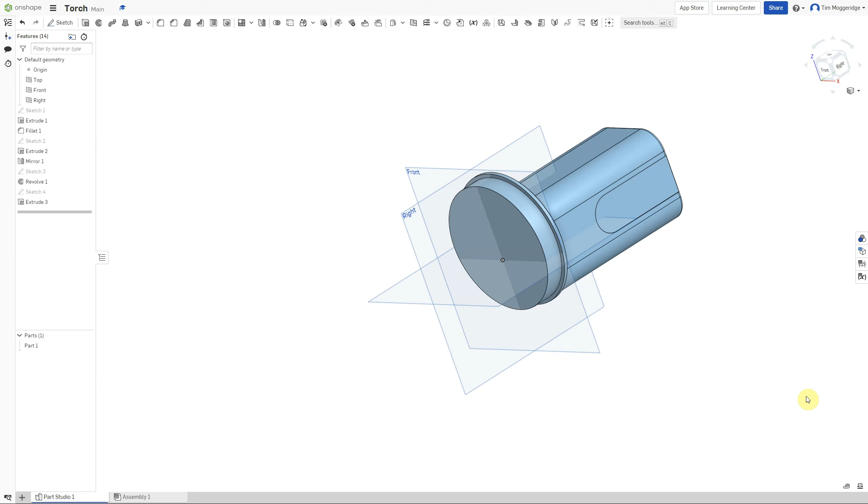Welcome to the third Onshape tutorial for modelling a torch. On screen I've already loaded what we've done in the previous two videos, and now we're going to add on the bit of the casing that houses the button.

I'm going to click on here and go to isometric just to put this in a sort of a 3D view. And the first thing I want to do is to create a new work plane.

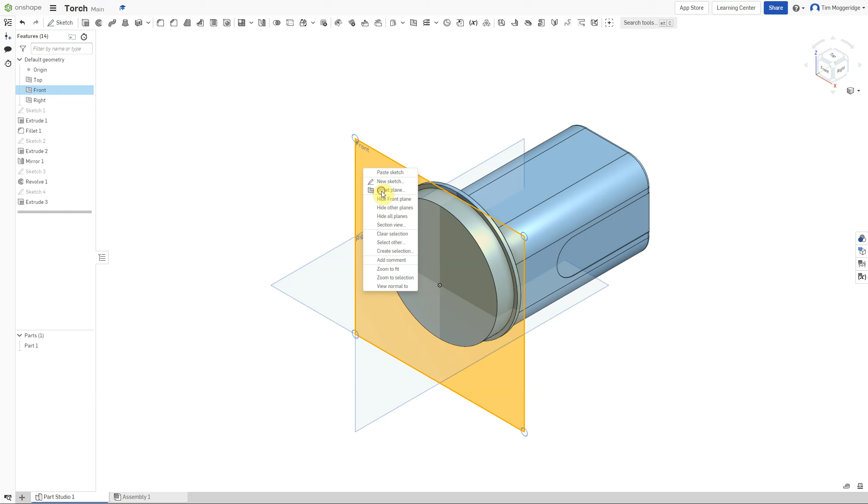I can create this a couple of ways: either use the plane feature tool up here, or right click on the front work plane and left click on offset plane. Now it defaults to 25mm distance, but I want that to be 66.

You can also see that it's trying to come forwards of the plane, so if I spin that around it's coming ahead of it, and I want it to be in the other direction, so I'm just going to click on the arrows to reverse it, and then click on the tick.

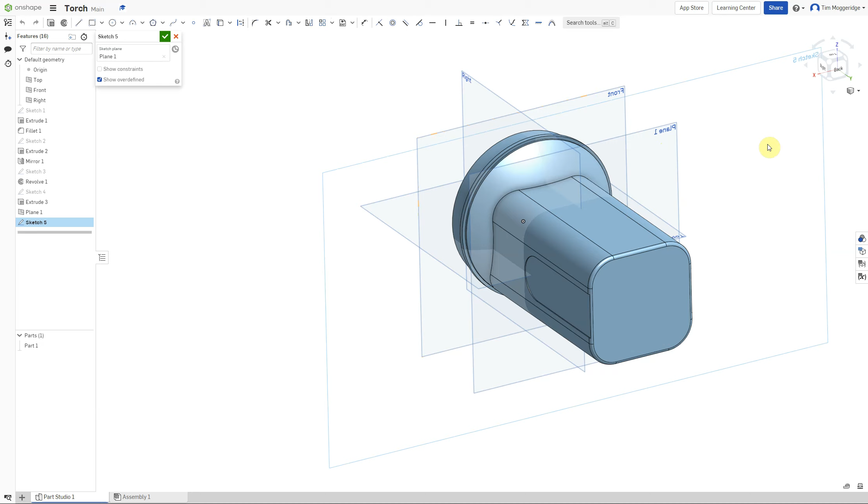If I spin that round, I'm now going to right click on plane 1 and create a new sketch, and press the N key for normal to. Doesn't matter if it was spinning around the other way and I was viewing from the other direction, I can still do this sketch the same.

I'm going to use the line tool to create this sketch, and I'm just going to zoom in slightly so that we can see the edge of the right plane a bit more clearly, because we're going to use that as our guide for starting our sketches.

Now if I draw a line, hovering so it's over the origin and lined up with the edge of the front, the right work plane, and I left click and hold and drag the line out and then let go, it doesn't want me to carry on with another line. It knows that I just want to draw one line.

However, if I click to start the line and then click again to end the line, it assumes I want to add an extra line in. So let me demonstrate that.

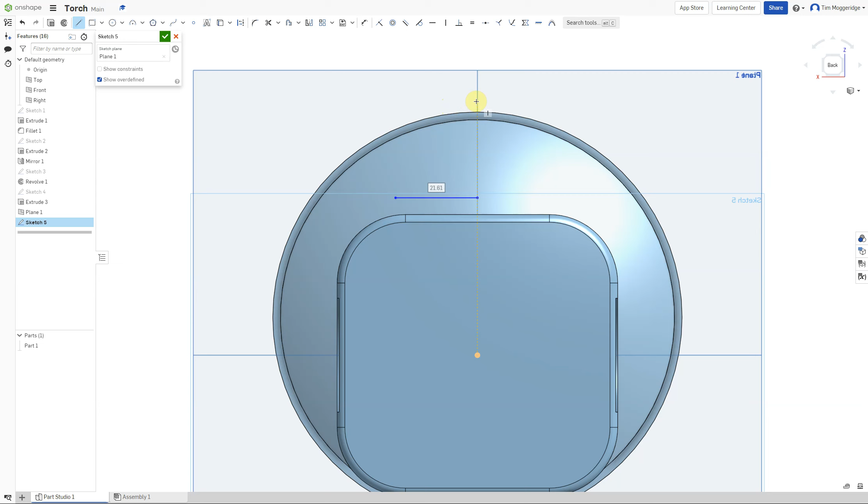Again, I'm going to line up with the edge of the work plane, which also lines up with the origin - you can see the dotted lines. I'm going to left click, draw a slightly shorter line, left click again, and then left click on the end of that line. Because I left clicked on the end of that line and it's completed the line, it's not tried to draw another line.

But if I go left click, left click, left click, left click, it keeps drawing lines until I close it or press escape. Okay, I'm just going to turn the line tool off, drag over there, and then press my delete key to delete those lines.

Okay, so let's put some dimensions onto these lines. First of all, I want to dimension how far up this line is from the origin. So I'm going to left click on the origin, left click on the line, left click over here, and I want that to be 36mm.

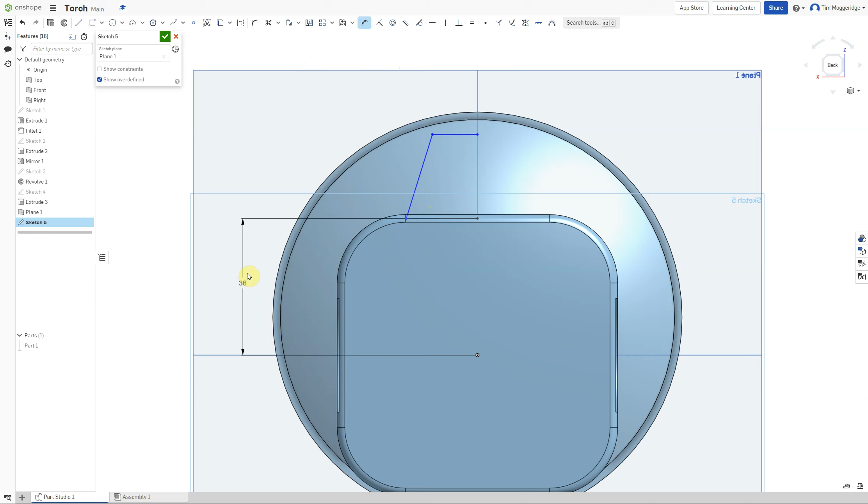And I want to dimension the length of the two lines. So the bottom line I'm going to left click on, come away from the line so it's nice and clear, and I want that to be 23mm. Then the top line I'm going to left click on and go above, and I want that to be 16mm.

Now I actually want a fillet here, a little radius, so I'm going to use the fillet tool. I'll click on the dot, and it's remembered the last number I put in, so it's put R3 in there, which is what I want. If it had been 18, because it was remembering an 18mm radius I'd drawn previously, I could change that after left clicking. 3mm is what I want, so I'll just enter that.

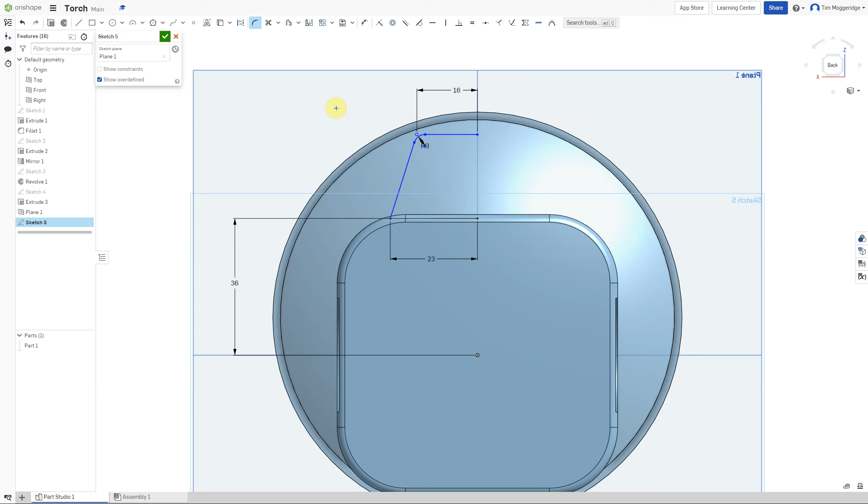Now I don't know what height this is, but I'm going to use the tangent tool to create the height here. I want this radius to blend with the radius of this circle here. So I'll click on my little radius, and then click on that one, and you can see it's moved it up.

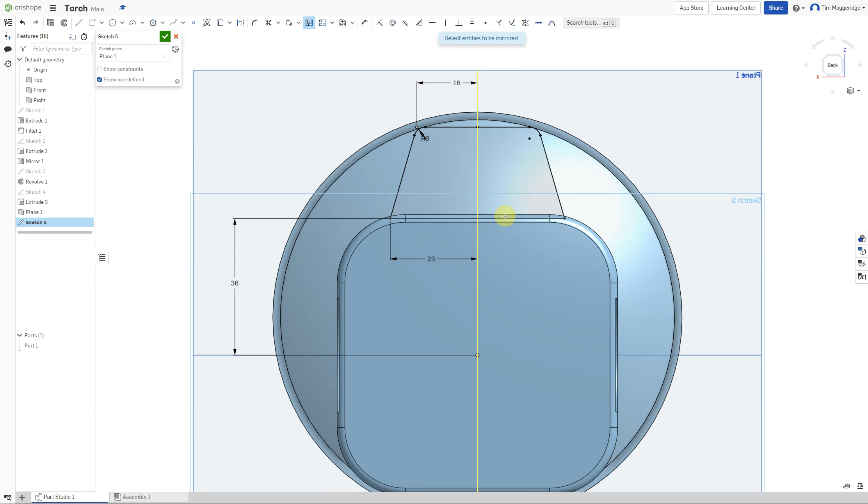What I also need is a full shape. I've only drawn one half, and the reason for starting on this edge of the work plane is I can use that edge as a mirror line. We've mirrored features before, so let's mirror the sketch. Using the mirror entity tool, we pick the line which is the edge of that work plane, then click on the lines we want to mirror, and that creates an enclosed space. Did you notice it just went light grey? If I spin that around, you can see it's a light grey colour.

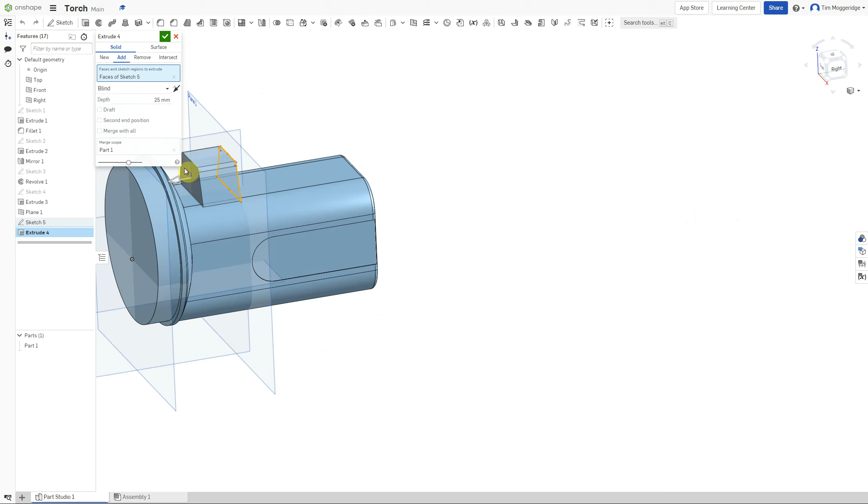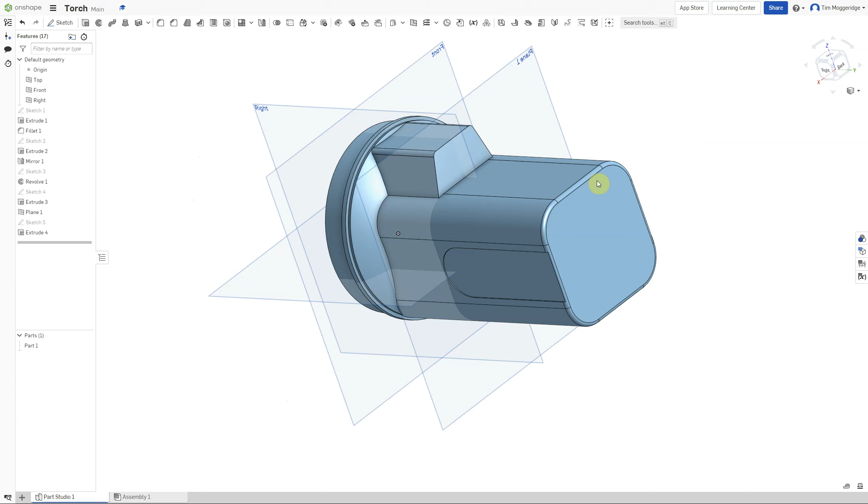So now I need to extrude that. I'm going to use the extrude tool, and it's gone off in the right direction. If I hold the right mouse button down and spin it around, you can see it's going in the right direction, heading towards the round part we did last video. But I want that to go up to a particular surface - it's adding, not creating new, which is right, but I want it to go up to a face, specifically this flat face here. If I click the tick and zoom out, right click and zoom to fit, you can see that shape.

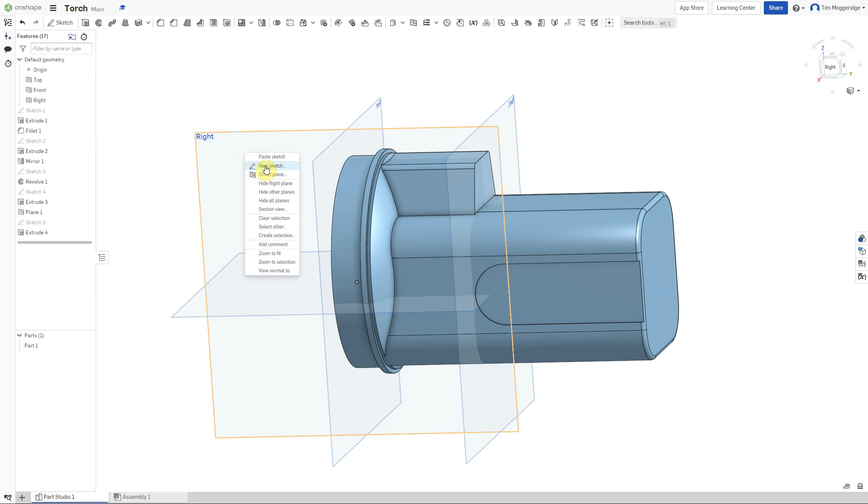Now the next thing to do is the part where the switch fits inside, which also forms part of the handle, so we need to start cutting out a shape at this end. I'm going to right click on the right plane, left click on new sketch, press N for normal, and we're viewing here, and I'm just going to draw a circle.

I'm now going to use the coincident point for the center of the circle and this vertical line. I'm not going to put it in the middle of the line because it would jump there and I don't want that, so I'm just going to make sure I click above the middle of the line, and that's lined it up.

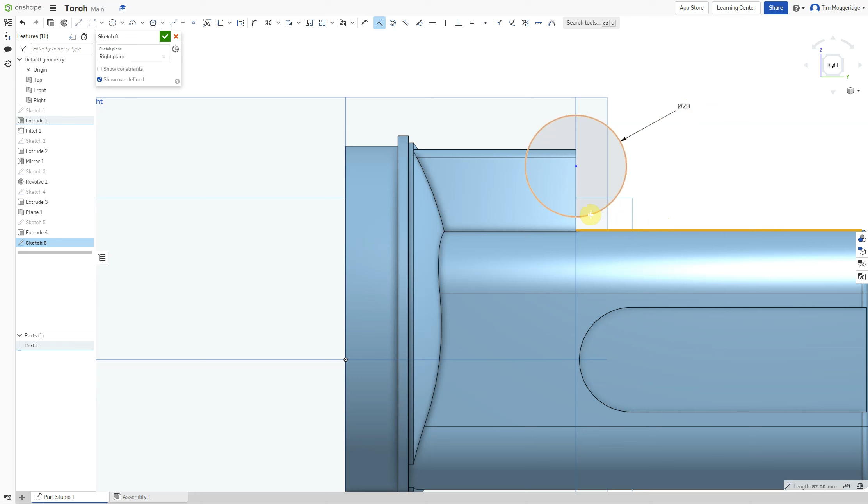And I'm now going to put in some dimensions. So the dimension of the circle, the diameter, is 29 millimeters, and I want the bottom of the circle to line up with this line as well. So let's try a coincident point - pick that and that. Now it doesn't like it: a coincident constraint cannot be applied to two curves of different types. So what do we need to do?

Well, actually what we need is the tangent tool. So let's click on the circle and then click on that line, and it puts a tangent in there. That's what we want - okay, so that's in the right place now.

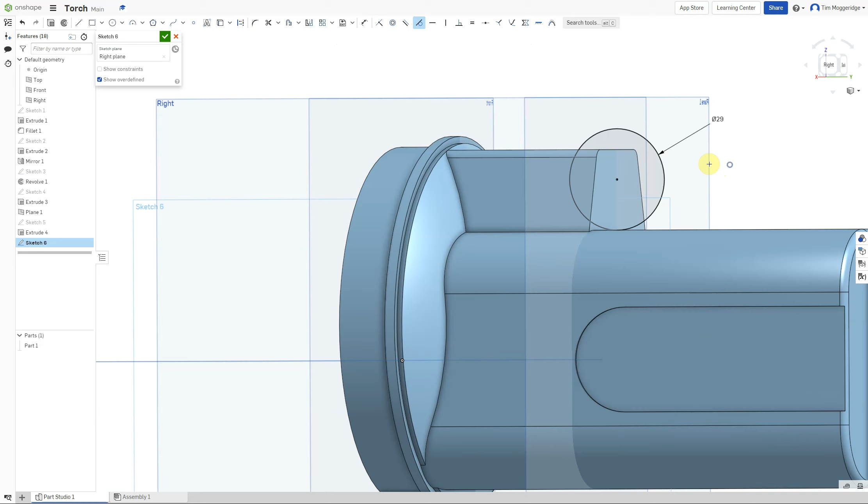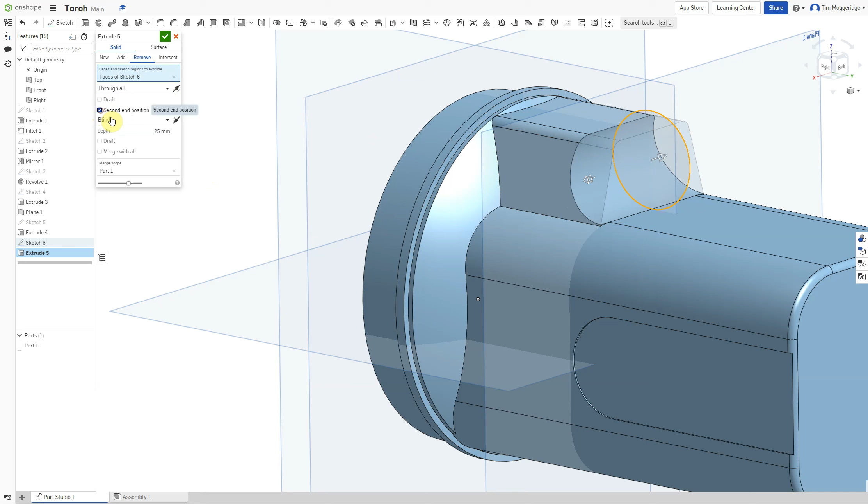What I now want to do is remove that shape from this block of material. So let's go to our extrude tool, and you can see it wants to add it in. Let's click on remove, and it's gone off in that direction, 25 millimeters. What I actually want is for it to go all the way through, so I'm going to go through all, then tick the box that says second end position, and make that go through all as well. Tick the box, and then we've got our nice shape.

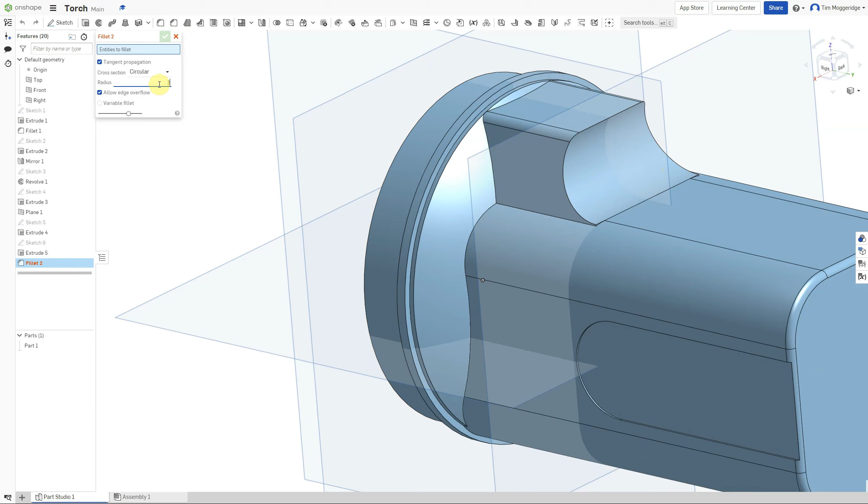Next thing we're going to do is put a fillet on here. This should have a radius on these two edges. So let's use our fillet tool, and I want that fillet to be 3 millimeters. I'm going to click on this edge, and you can see automatically, without clicking on the other edge, it's gone all the way around. Now I don't actually need a fillet on here, but it won't matter because later on we're going to get rid of that. The geometry of the model means it needs to apply a fillet all the way around, so we'll click the tick and we're happy with that.

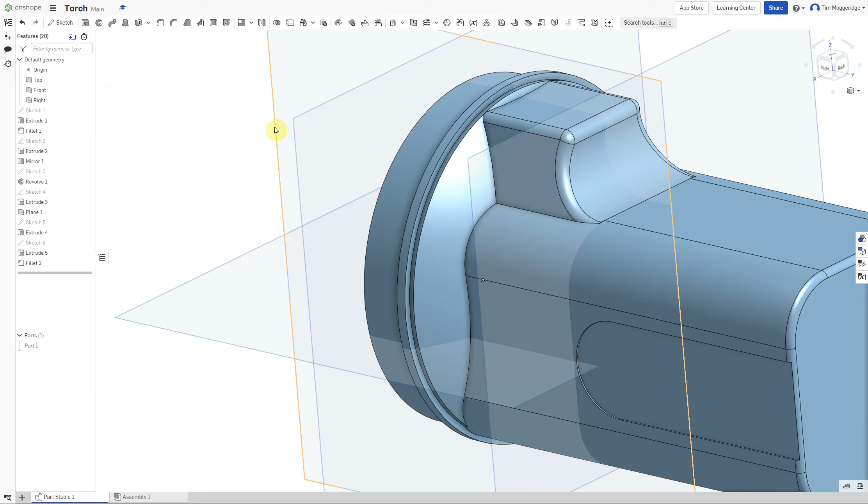Now the only slight problem with this is we've got a little bit of a step. If we zoom right in here, you can see we have a slight step where it's not blended into the curve, so we need to sort that out. I'm using the scroll wheel to zoom in.

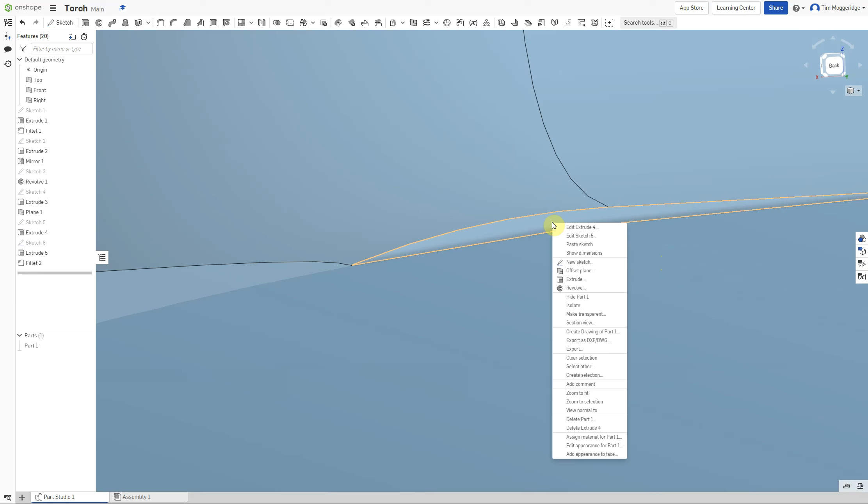I'm going to right click on that flat surface and go new sketch, and I'm going to zoom out badly. I'm going to press N to view normal to the sketch. Let's pull that around. There we go, press N to view normal, and then I can zoom in with the scroll wheel.

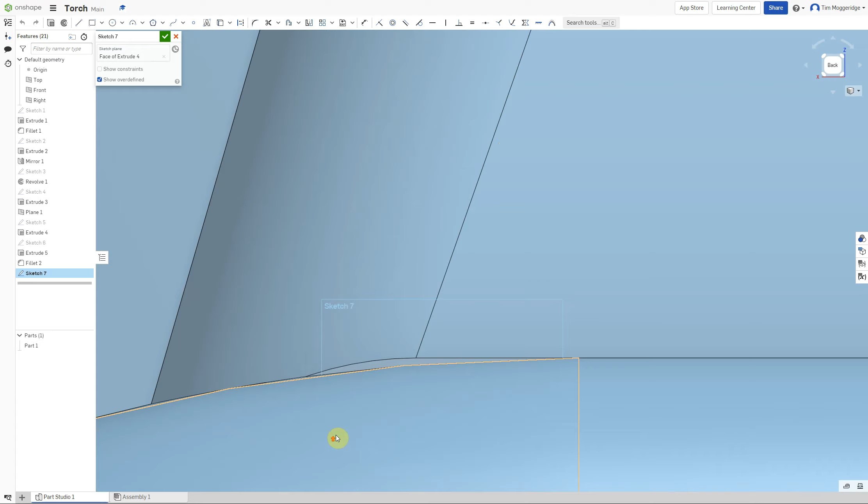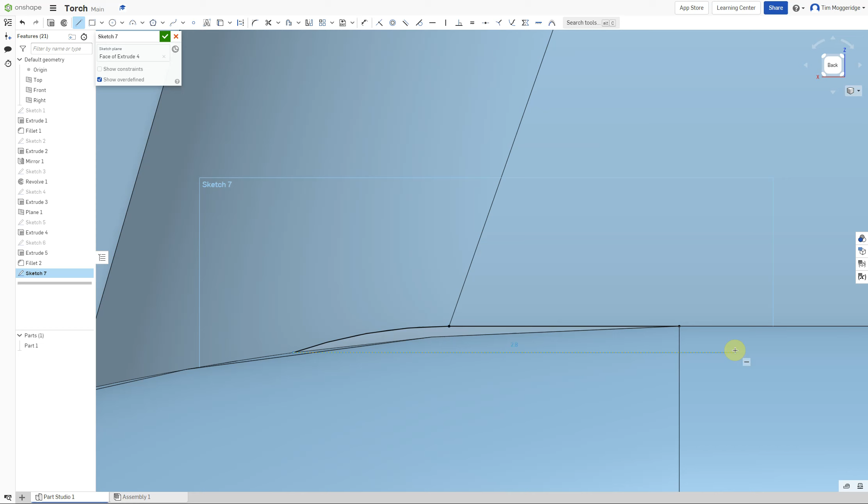The first thing I do is use this tool here, which allows me to convert an edge into a sketch entity. So I'm going to click on the curve, and I'm going to click on that line, and then use the line tool, and I'm simply going to come across horizontally, and come down vertically, and then just trim those ends off, trim the corners off so I'm not breaking my rules, and I've got that shape.

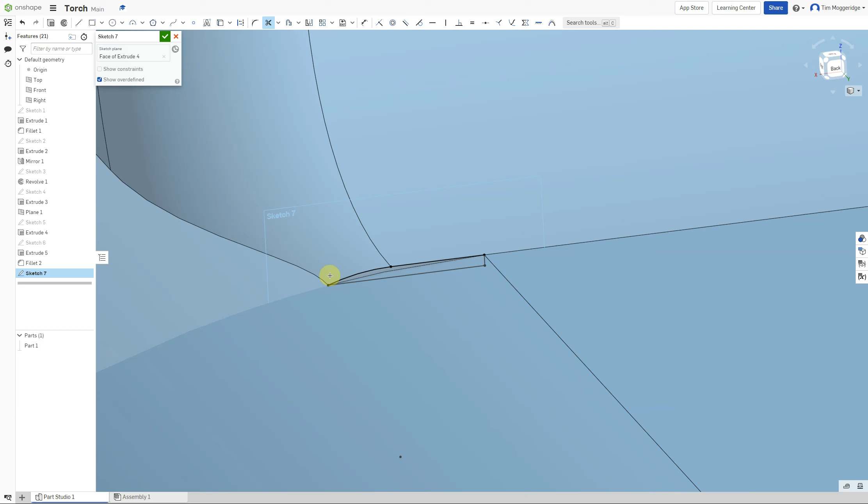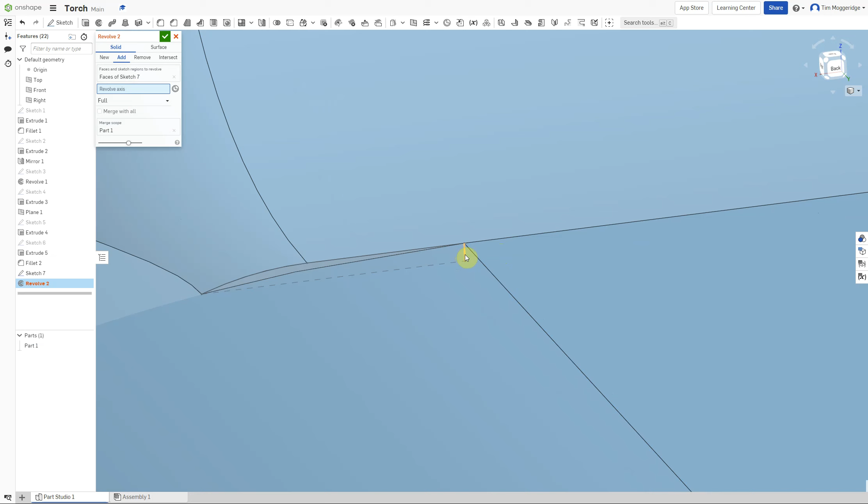So that shape now is on the end of that bit that wasn't working, and I'm simply going to revolve that so it blends into the radius. I only need to revolve it 90 degrees, but I'm actually going to revolve it 360 degrees because I can then mirror it on the other side to do the other side. So let's use the revolve tool. We don't want it to be new, we want it to add. Merge scope, where we want it to merge with the body, and we want the revolve axis to be that vertical line there. So you can see that spun round and blended that in, and we can click the tick to say we're happy with that.

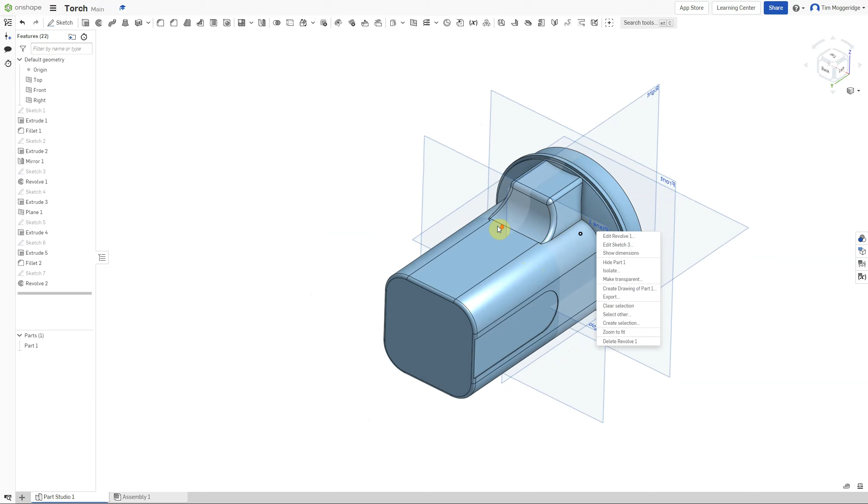Let's go to isometric, and it's zoomed to fit. Let's hold the right mouse button down and spin it around. We've still got the same problem on this side. You can see the step there, where on the other side we've got a nice blend.

So on this side, let's mirror it. Let's use the mirror tool, and we don't want a part mirror, we want a feature mirror. The feature to mirror is going to be our revolve, and the mirror plane is our right plane, so we can left click on the right plane there, click the tick, and we can see that it's blended that in.

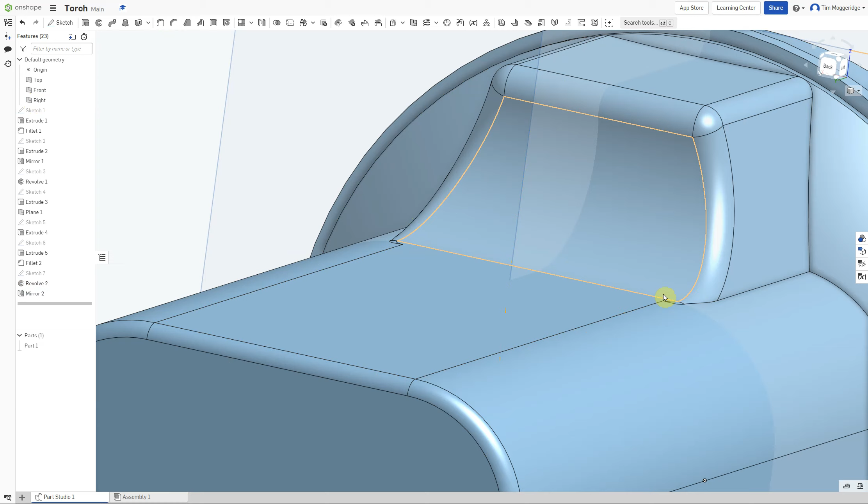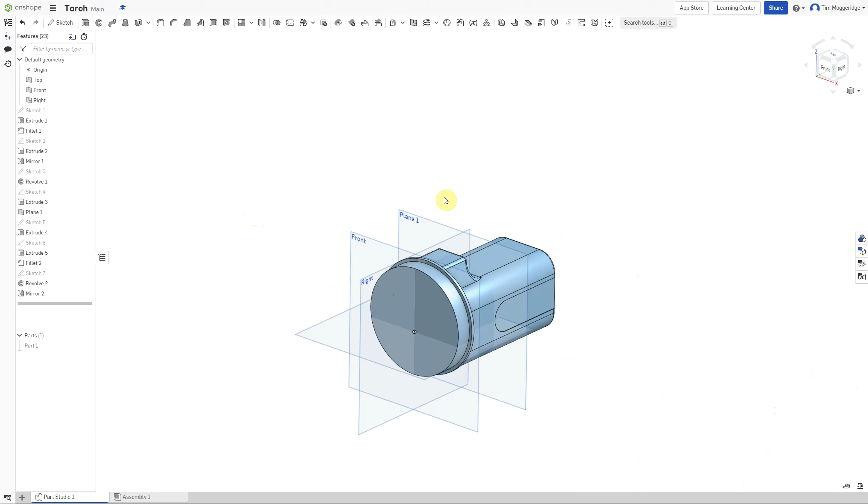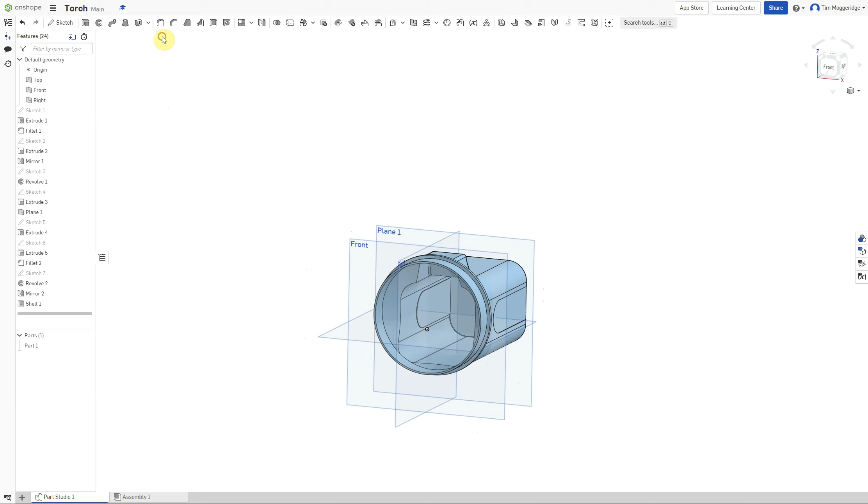The last thing to do is actually hollow this whole shape out, because our torch body isn't a solid body, it's actually a shell, and that's the tool we're going to use. So we click on the shell tool, and click on this front face, and you can see it defaults to 2.5. If I spin that around you can see it's hollowed it out, but we want that to be 1.5 millimeters, so we change that to 1.5, hit enter, it updates, you can see it's a bit thinner, click the tick, and that's the main part of the body done.

So that's the end of this video. It will automatically save, and in the next video we will start looking at adding in the rest of the handle.